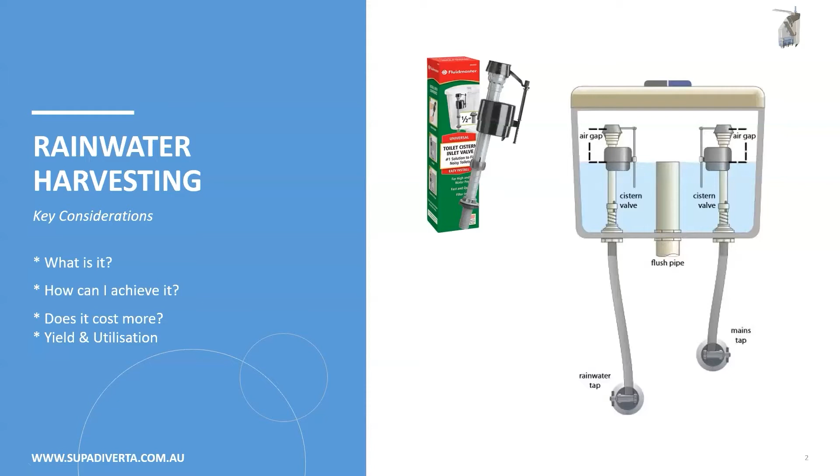Now on the next slide, we'll talk about how to outfit a tank. Most people, when they outfit a tank, they might think of the size, they might think of the colour. There's a lot they don't think of, and there's a lot they're not told about.

For example, the top left photo shows a very high fitted overflow pipe. Now, overflow pipes have mesh, and that mesh can block. So for maintenance, you either have to take the pipe off on the outside or remove the top meshed inlet and clean the mesh via the top meshed inlet.

The top left photo shows the inlet a long way from the tank. You wouldn't be able to clean the mesh. But the photo also shows something else: the overflow pipe is fitted very high, very high.

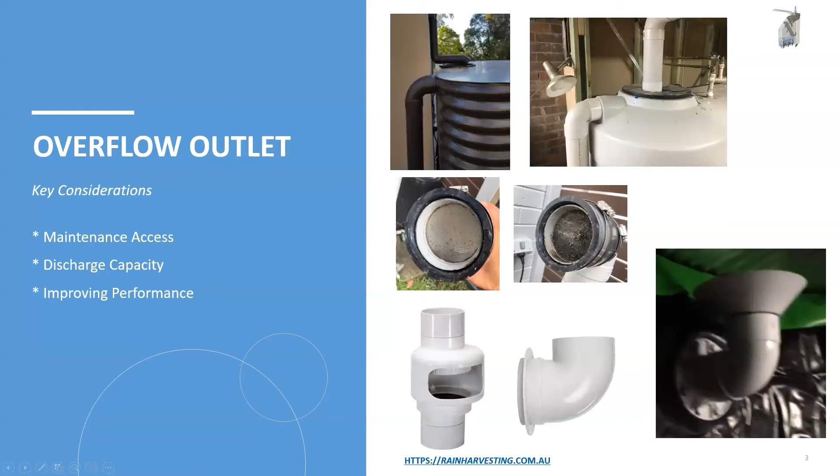In the next slide, we see an inlet with a lot of rubbish and vegetation on it—vegetation grows pretty quickly once the mesh clogs up. You can buy commercial products, a screen that goes above the mesh, or just get some shade cloth. Cut out a round piece of shade cloth, oversize it, so you can put a couple of stones around it to anchor it down, although most times they don't need anchoring—they don't seem to fly out with the wind for some reason. And you won't have all that vegetation. But it's important to constantly check it, and having something other than the mesh—whether a commercial product or shade cloth—is a good idea.

The other thing you have to look for when you outfit a tank is make sure that the valve that supplies the pump isn't on the bottom of the tank, as most are. The worst quality water in the tank is the high density water that settles on the bottom—it's low in oxygen, and that's also where the sediment layer is. You don't want a pump drawing water next to the sediment layer. That valve at the bottom left is a drain valve.

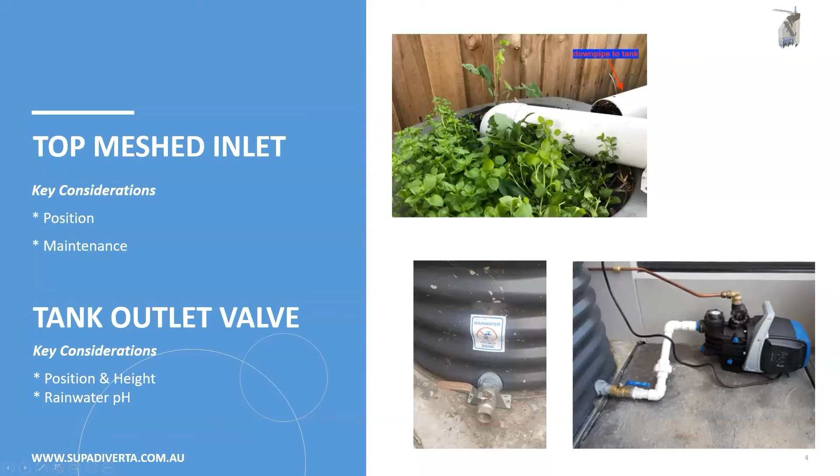This next page shows a tank with a cover. Now, under that cover is a mains water switching device. Now, this is very clever - it's neat, there's no box on the wall. There's a submersible pump under it, which supplies water to the mains water switching device. It's a clever device. I just want to draw attention to the 2 copper pipes.

Now, one of those copper pipes is bringing mains water to the mains water switching device, but the other copper pipe goes into the house, and a lot of the time that will have rainwater in it. Again, it's not a good idea to have copper pipe with high acidic rainwater.

Rainwater is naturally acidic. On the left of the tank, we see a top meshed inlet, and we also see the downpipe, so this will be a new installation. Now, we also see the overflow pipe fitted.

Now, when that downpipe's connected and pushing water into the tank, diverting water into the tank, just think of where the direction of that water is - it's going over to where that submersible pump is. So the water will be falling at a height. And when the water level in the tank is close to empty, that water will be falling down at a height all around the pump on the sediment layer. Not a good idea, not a good idea.

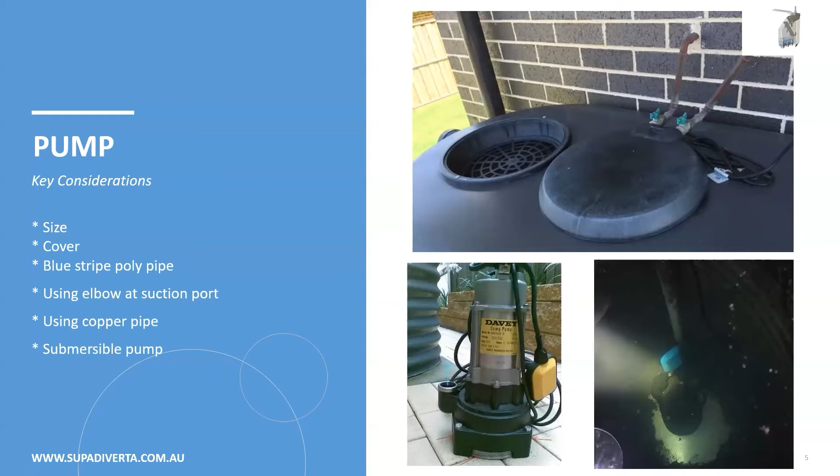Now the next slide, we've got dry and wet systems. I'm just going to go over dry systems very quickly. A dry system is a downpipe that feeds the tank through the top inlet. It's a downpipe that's very close to the tank, so when it stops raining, there's no water left in the downpipe. That's why it's called a dry system.

The negatives of the dry system are that you can only harvest one downpipe, unless you run other dry downpipes along the wall, which is ugly. Some people do it, but it's ugly.

Now I'm going to go straight on to wet systems. Wet systems allow additional downpipes to be harvested. You can harvest another 2, 3, 4, as many as you like. But they have problems - these problems can be overcome though. We'll go into that later.

One of the biggest problems with wet systems is the diagram you see. I originally saw this on the Victorian Plumbing Industry Commission website, and I complained about it then. And when the Plumbing Industry Commission was abolished and became the Victorian Building Authority, which incorporated building and plumbing, they also adopted it. And other regulatory bodies in other states also adopted it.

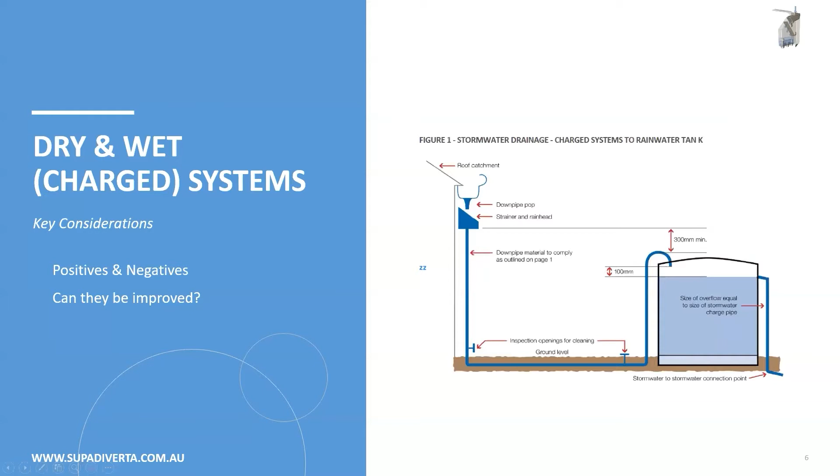Now, next slide. We have a slimline tank with a vertical riser. There's a few things about this photo—this is typical, very typical. Firstly, on the wall you can see a couple of copper pipes, 2 copper pipes. That wasn't the purpose of putting this photo up; I only noticed that late in the piece.

The vertical riser at the top shouldn't be that high. It should go over and be horizontal, and have a flap valve on it to stop mosquitoes breeding in the pipe. Mosquitoes can access that pipe, the standing water in that pipe.

Now, this slide says first flush diverter. What is its purpose? A first flush diverter collects the first dirty roof wash, the most polluted water off the roof, as it comes down the downpipe into the tank. But what you see here, a vertical riser with a first flush diverter fitted to it, is typical of new home installations and the way a lot of plumbers fit them to existing properties.

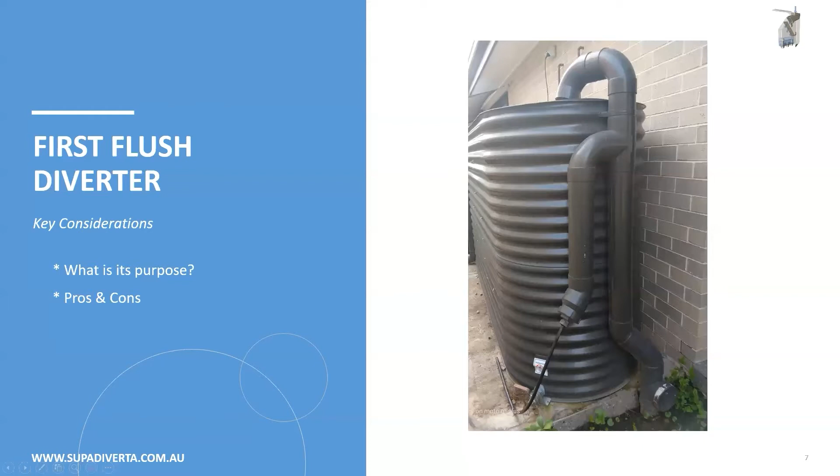Now I'm just going to mention downpipe adapters. These are at the bottom of downpipes where they join the stormwater. They present an obstruction, and they're actually not compliant—if you had that obstruction in the downpipe, it wouldn't be legal. But what I've put this up for is to just demonstrate that the path of water going to the stormwater pipe is smaller than the downpipe.

Now, there's a few reasons I want to mention this. I don't want to spend too much time on it, even though it's extremely important.

Roof water harvest downpipe sizes have their own regulations, based on a 1 in 20 year storm event. Stormwater pipe is based on a 1 in 100 year storm event. And the stormwater pipes also accept water off surface drainage and ag pipe drainage.

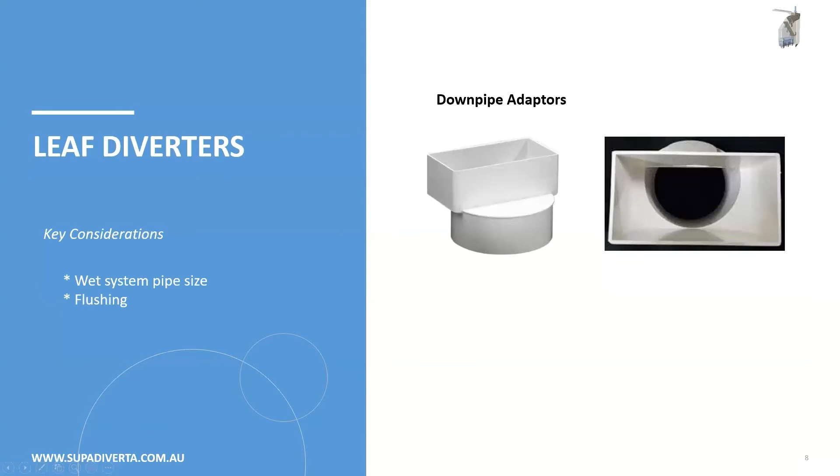It can just come off - instead of having an elbow at the bottom of the vertical riser, you could have a T, and the extra outlet can go to the low restriction inlet. And the low restriction inlet supplements the head on a wet system. The vertical riser always has the same head at the top of a tank.

A low restriction inlet reacts to the height of the water in the tank, and it will always have priority fill over the vertical riser, because the water level in the tank will always be lower than the water in the vertical riser. An additional benefit is that the water left in the wet system, in the vertical riser, and in the downpipes will be the same level as the water level in the tank, and not the level of the vertical riser above the tank.

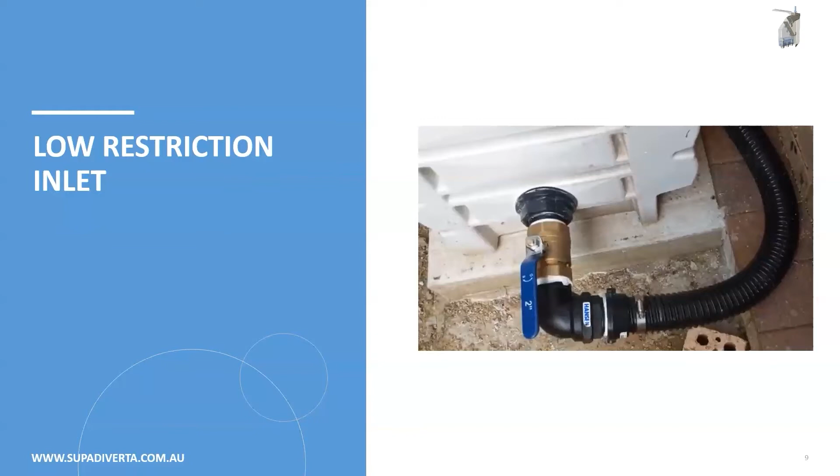Next slide. Now what we have here is something that we developed during our SupaDiverta research and development program. It's extremely effective.

Now, how it works is sediment - floating sediment, suspended sediment in a wet system - settles as bed load. Now, we have a sediment trap. All it is, is either an upside down Y junction or a T. A Y junction has a bigger hole.

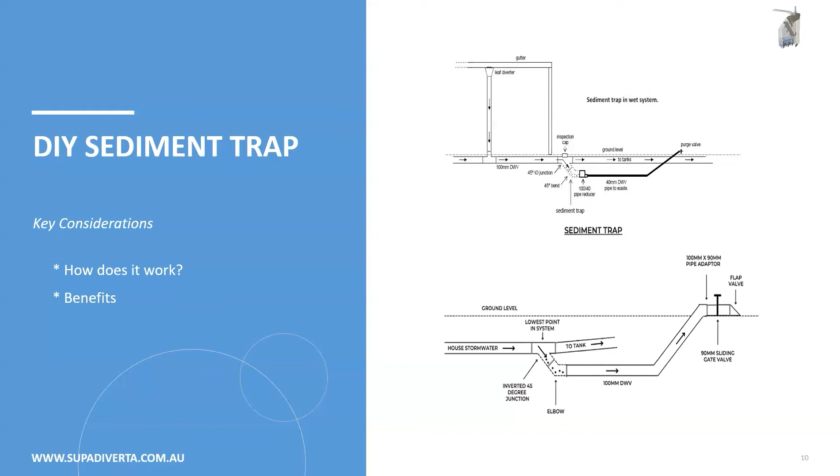No overflow pipes needed, no vertical riser needed. Tanks will never overflow. You can harvest every downpipe on the house, every downpipe in the neighbourhood, provided the downpipes are at the same level. Just put that in for a bit of interest. If you want to harvest more water without fear of the tanks overflowing, check out the SupaDiverta.

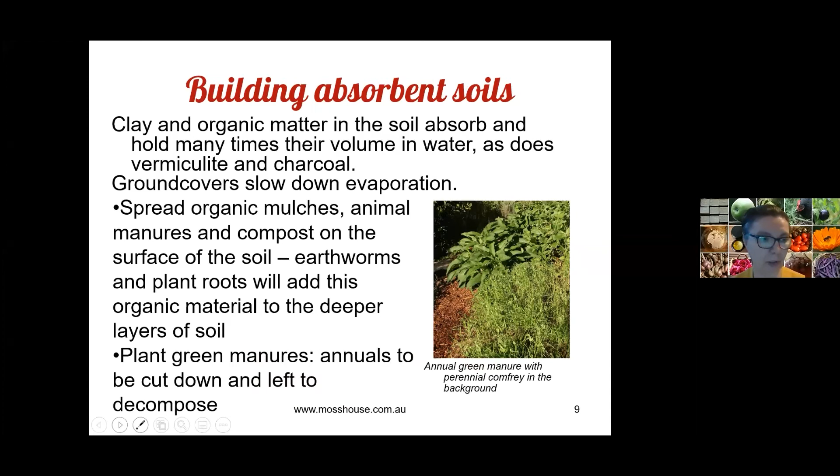And planting green manures - you can see this is a perennial green manure, which is comfrey. I just chop and drop it around my fruit trees. And this is an annual green manure, which I use to cover fallow pieces of ground when I don't grow my food, mostly in between seasons.

Water holding structures: if you have a steep garden, you may dig horizontal trenches called swales, and in my case they are filled with wood chips. I've got 5 swales like this, and the soil I dig up when I make a swale, I put down the slope and plant trees on it.

Because water gets collected in a swale - I'll show you a diagram in a moment - it feeds the soil below the swale and percolates into the ground really slowly. Even after really dry days, when I dig through the wood chips, I'll see it's really moist. There could even be water at the bottom of the swale. So this is what a swale looks like.

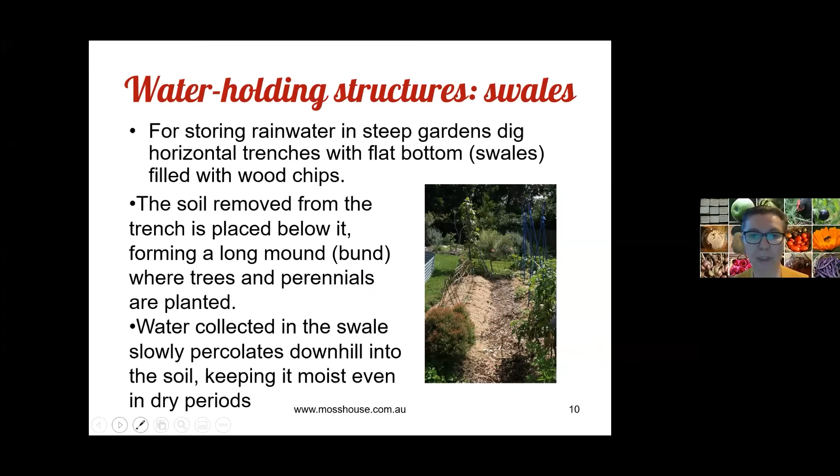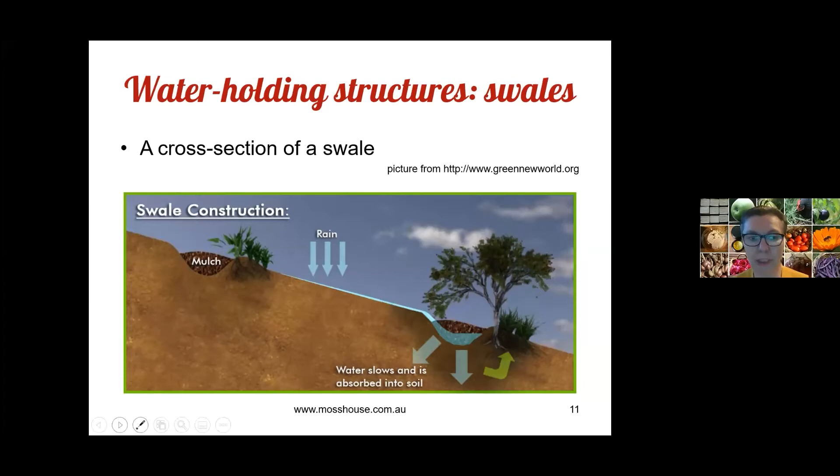I also use swales to take the overflow from my rainwater tanks, so it goes into swales and into the soil. I also use the overflow from my pond, which has a little overflow so the water doesn't go over the top - that also goes to a swale. So basically, that's where I planted most of my perennials and fruit trees, on a swale system, because they hold water. You can also use bog gardens.

You can create a garden, part of a garden or a sunken garden, which will hold water, and grow plants which can deal with being covered with water completely. So you can grow edibles - water chestnut, watercress, arrowroot - or just plant native bog plants, which will dry out in a heat wave when it's really dry, and then resprout after rain when your bog garden fills up.

And a rain garden is a similar variety, but it could be put in a raised garden bed, and it's for filtering water which comes from your drainage pipes, overflow, or gutters. So it will be released slowly into the rest of the garden, and again you avoid the water just running off the surface of your garden.

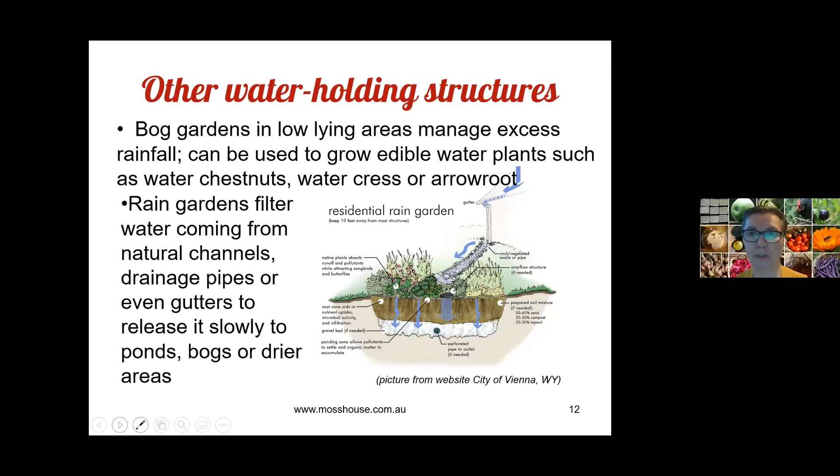Self-watering garden beds - this is an absolutely great thing, and this is how I grow the majority of my vegetables. I've got 11 raised garden beds, and 8 of them are self-watering or wicking beds. That's where I grow most of my annuals, so all the typical veg you usually buy from a supermarket.

The water reservoir is under the soil, so you've got pipes - you can have pebbles or special plastic forms like water-ups. Then you put non-woven weed mat, something like ag fabric or geotextile, and you put soil on top. I usually put a layer of vermiculite, and the water level touches the vermiculite when I top it up through a pipe, and then the water gets wicked up into the soil.

Usually the highest level of soil here would be 30-40 centimeters, because the water cannot get wicked against gravity much higher than that. But it's absolutely great - it saves me a lot of watering, because the water is always deep in the soil, so it encourages plants to grow a long root system to reach the water. If you only water from the top, that encourages the plants to spread their roots pretty shallow, and if it gets really hot or you go away on holidays and nobody waters your garden, your plants die.

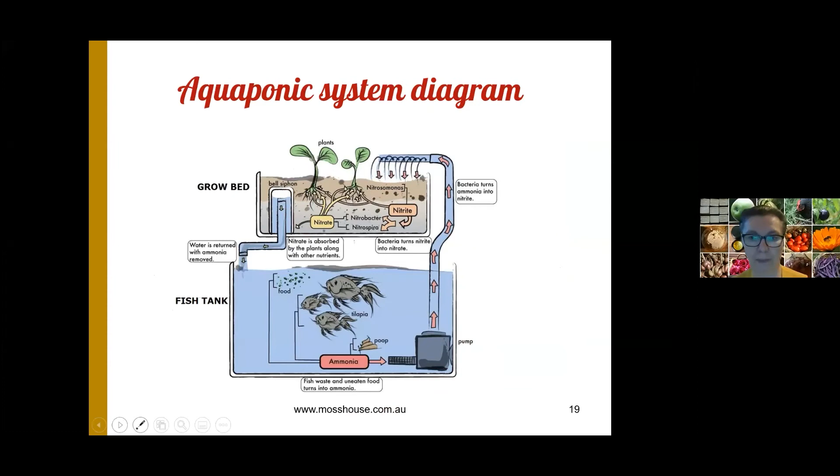You get a special bacteria like Nitrosomonas, so the nitrite from ammonia in the manure is converted into nitrates, which the plants can take up. Then you get bell siphons - when the water level reaches just below the level of the pebbles, the siphon empties the water into the fish tank. I could talk about the water-wise garden for about 4 hours, but my time is nearly up.

So another thing, which again would be like a 1-hour talk - go to sustainabletable.org.au. Even if you don't grow your own food, this website gives you hints on how to limit the water and energy cost of your food, basically how to lower your ecological footprint related to what you eat.

Consider where to shop, and eat less meat - if you only eat meat twice a week, you reduce your food-related footprint by 40%. It's as simple as that. Buy seasonal produce because it's not imported. Reduce food waste and compost food scraps.

If you don't have your own garden to compost, use a swapping service called ShareWaste. It links people who have waste they cannot compost themselves with people who would happily take it - community gardens, larger gardens like mine, or farmers. So you could get rid of your waste as well.

Ethically raised and sustainable meat and seafood is a good way to reduce your footprint. Grow your own food, always. Eat whole foods - not processed, not flours, but grains. Avoid packaging, since a lot of energy goes towards packaging, especially plastic.

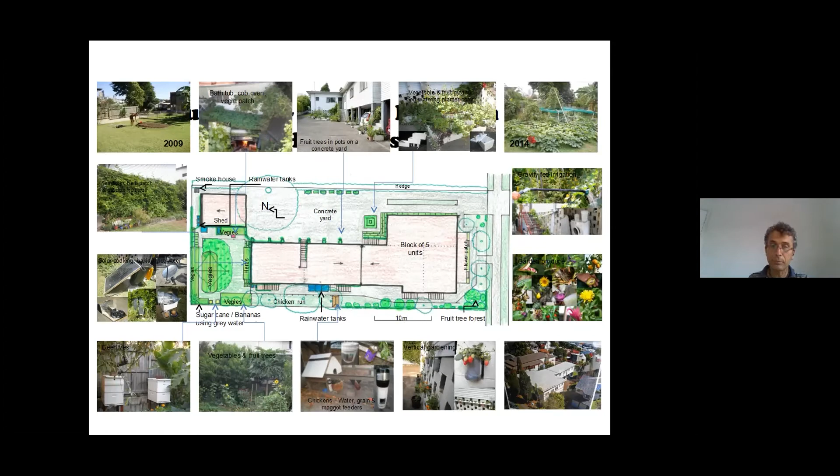So here we go about rainwater harvesting, and I'd like to point out, everyone has got rainwater tanks, either large or small, like these IBC tanks. That's what we did in our rental property. That's the downpipe, stormwater downpipe, which we diverted into these IBCs. There are 3 of them.

Obviously, when you're harvesting rainwater, the first flush is always dirty water, and you don't really want to use it as drinking water. So how does that work here? Water goes into the first tank from the top through the T section, and it's sealed off. When this rainwater tank fills up, water starts to flow into the second one, and when that one fills up, it overflows into the third one. The third one is covered in black plastic, which stops algae growing there. And that was our drinking water.

The first 2 IBC tanks we used for the garden. When you think about it, some systems say the first flush would be something like maybe 10 liters of water. But 10 liters definitely isn't enough to harvest clean water when the air is polluted and the roof is polluted. So 2 cubic meters of water is, I think, very good to get clean water for drinking, even in the city.

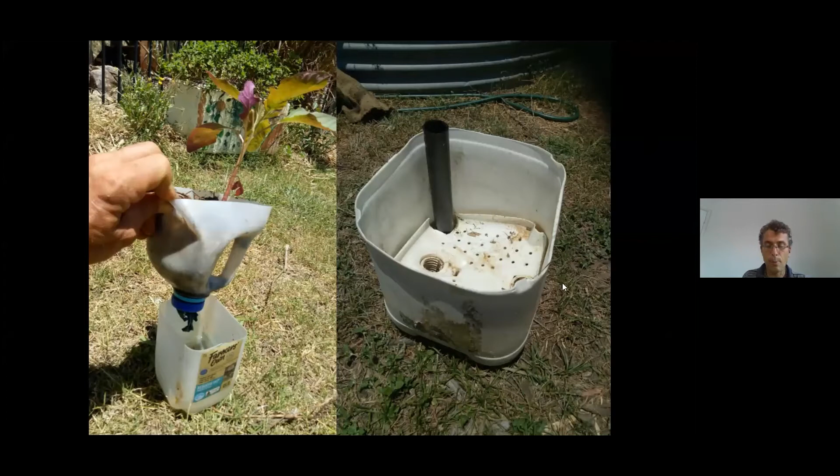But being a sustainable design engineer, for me that's not enough, so I used all available resources. This is a plastic 20-liter drum from cooking oil from our local restaurant. I chopped the top off and made holes, a couple for legs, and put it into the drum. This black pipe is there to get water in, and you've got a 20-liter self-watering planter pot where you can grow whatever you like.

Looking at Margaret's presentation, we also used a vertical garden made from poly pipe, stormwater pipe, and grew strawberries there. But as a water storage, I actually used macadamia shells. As half of that pipe filled up at the bottom, that was a water storage, and water was automatically supplied from a plastic bottle. So it could go without watering for quite a long time, but again, not weeks, and for me that's not enough.

So I went further and was using, or still use, this styrofoam box as a self-watering plant box. Everyone can make it because it's so simple, very light. You can transport it, and you can use whatever material - it doesn't need to be a styrofoam box. I just used that because I could get hold of it.

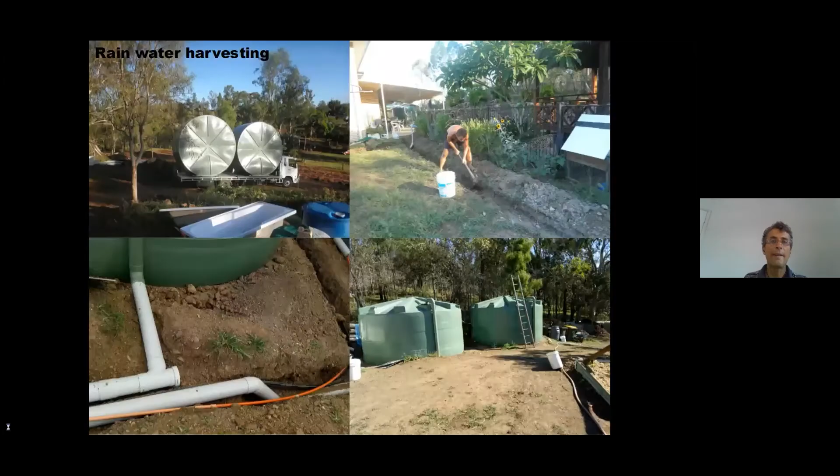So the first thing, we actually got rainwater tanks in, which are 22,500 liters each. I had to connect the roof to them, so fair bit of work, good exercise, keeps me fit. And that's how we started. From our experience, we found that these two tanks would be enough to run the whole household, a family of 5, throughout the whole year, just on rainwater.

And these are just the beginnings, where we had these self-watering planter boxes, where we could actually grow something green, and that's how we started.

And obviously a lot of compost, and compost, as Margaret already mentioned, would store a huge amount of water in a soil. So the more organic matter, the more water you store in a soil. And that's how we actually started our kitchen garden. And you can see the slope.

This is our veggie garden, built on septic overflow, gravel soaking area, whatever you want to call it. The weeds were growing like mad, and I had to whippersnip that every week. So I said, no, I'm not going to do that. So I built raised garden beds.

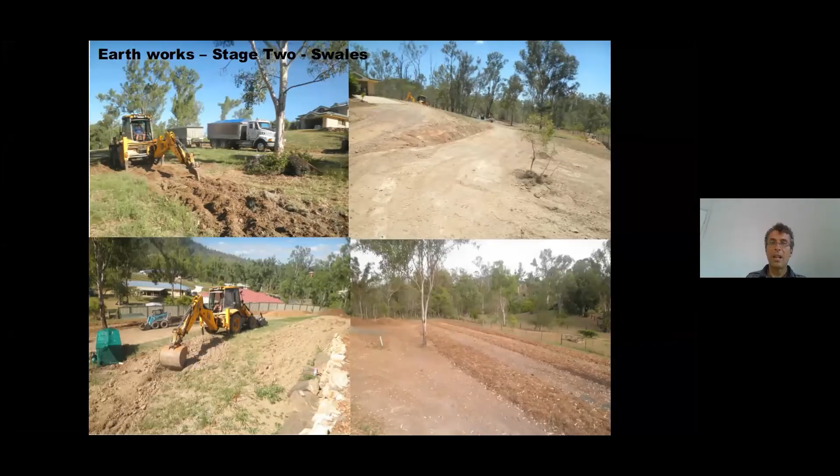And you will see how the swales work. That's how they actually hold water, and we have got 3 of them. So when one is full, it will overflow into the second one and into the third one.

In this instance, we had over 250 mil of rain, and it wasn't established yet, so you can see how it actually was breaking through. But now the swales look completely different.

So here are some ideas for you on how you can build your self-watering raised garden beds. In this instance, a plastic liner, builder's liner, and hardwood wood chips. They will actually stay as they are for several years before they break down.

Then I put a shade cloth on top. You can use a geofabric, even better, and the soil. The aggie pipe is there to distribute water into the wood chips. You can even improve on that to put stormwater pipes alongside, one next to each other, with hardwood wood chips in between them. So you've got far more water storage.

The difference between hardwood wood chips and pebbles is, in general, that pebbles would take up to 70% of water storage space, so only 30% is actually water storage, while wood chips would soak up more, and you have got more water stored that way.

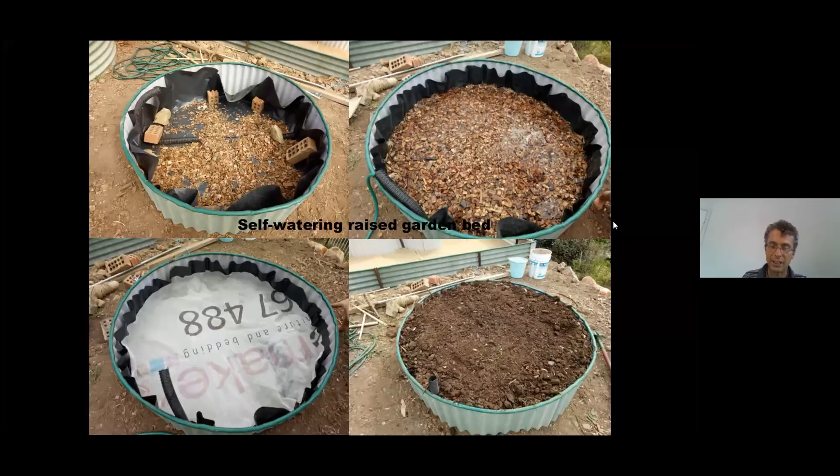Here is another idea. I always use materials which I have available. So I've got these bricks with these holes and grills, and each brick with each hole is actually a wick. Fill that up with dirt and then put the soil in, and that's the final result. The advantage of this system is that it will store the maximum amount of water in that bottom reservoir. Most of the space is just water storage.

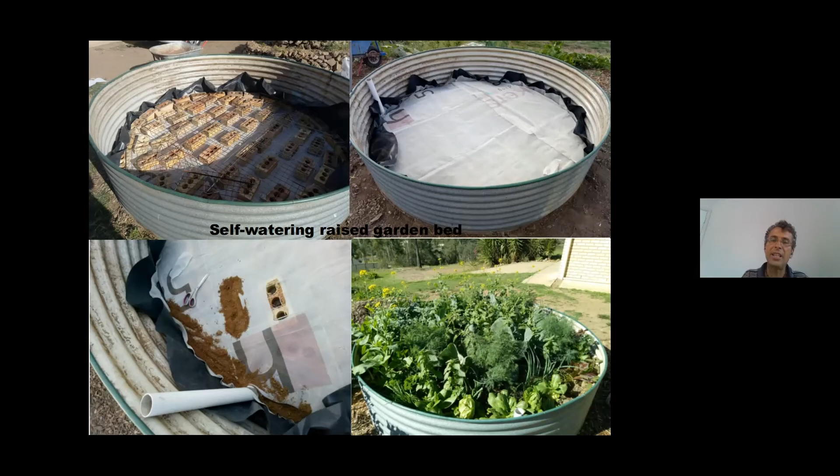Instead of bricks, on the other garden bed, I actually used planter pots. These are about 15 centimeters in diameter, about 15 centimeters tall, and when they are filled up with dirt, they are structural, so they will not collapse and they will hold the weight of the soil.

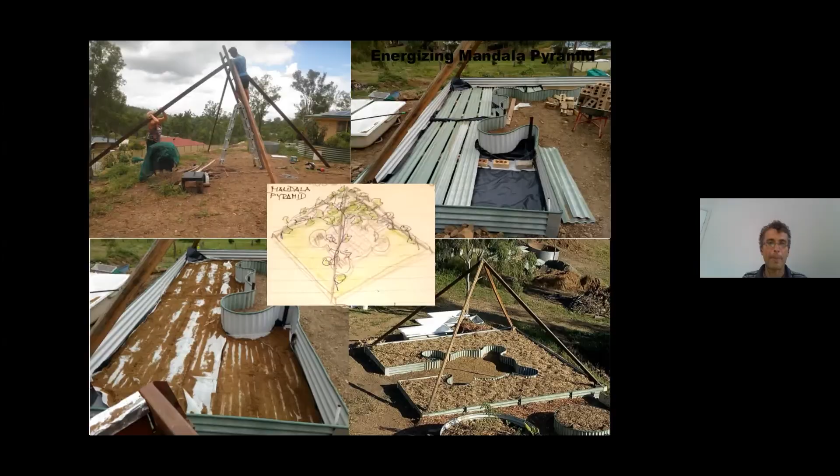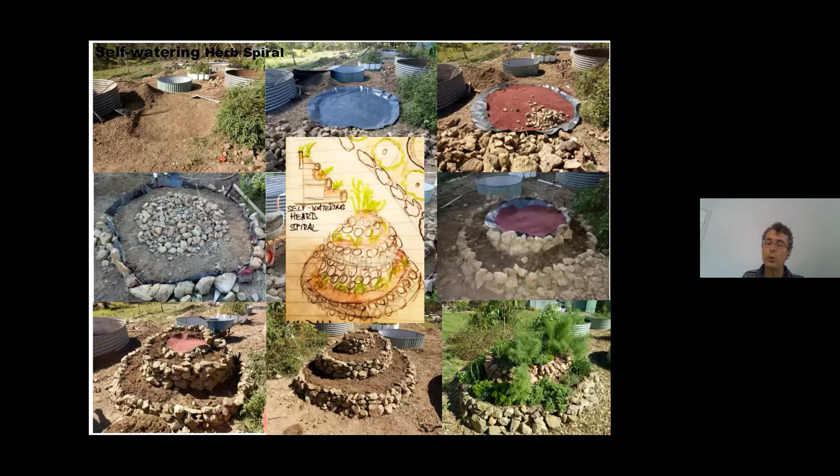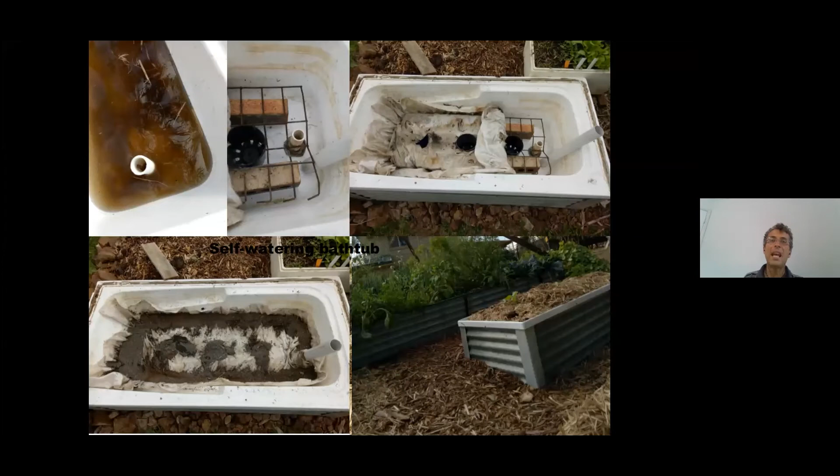Here is a bathtub. You can convert a bathtub into a beautiful garden bed. I siliconed the tub to keep water in, at the same height as the grille, so the planter pots act as wicks and also hold the wire mesh, with geofabric holding the soil. These recycled bathtubs hold up to 100 liters of water, and they're great for growing cucumbers, for example, because cucumbers need water all the time, and that's where they get it from.

Coming from Europe, this is a different environment and you have to start viewing gardening in a different way. So for us, wicking is a no-brainer - that's the way to go because it saves a lot of water and energy.

So Roman, we're pretty much running out of time now. Yeah, I will just finish it in a minute. Okay, no worries, thanks mate.